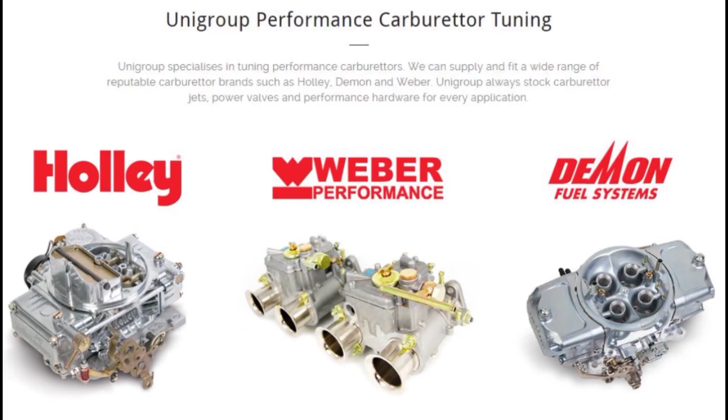We're in the dyno room. We've got a VK Commodore, Holden Commodore, 1985. It's a local Australian vehicle for those international people who may not know what a Holden is. It's here for a checkup. It's recently been purchased, and it's not a bad idea when you've got a high performance vehicle you've just bought to go over things and make sure everything's okay before you give it a hard time. It's also good for peace of mind and to establish some baselines. There are also minor complaints about some flat spots, etc. So we're going to run it on the dyno to see what we can find and come up with some fixes.

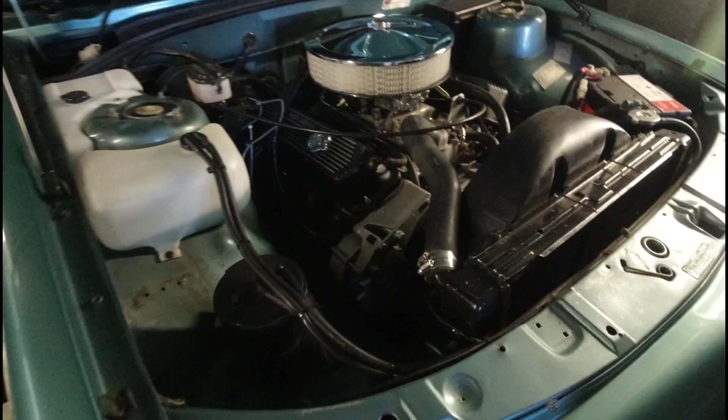A little bit of info about the engine and the car. It's a 308 Holden engine that's been stroked to 355 cubic inches. It's got some conrods inside, a main stud kit, and higher compression than standard - we're thinking somewhere around 10.5 to 11 to 1, thereabouts. It's got some roller rockers and a Brawler carburetor that we're going to look at today.

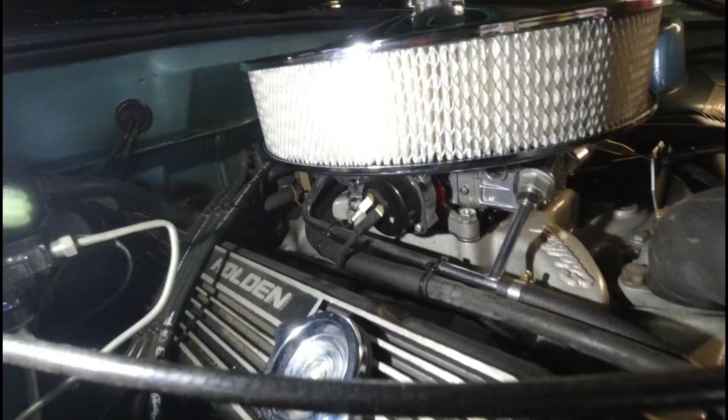Let's zoom in and take a close look. This vehicle has a Brawler carburetor with electric choke and vacuum secondaries. Just to clarify, vacuum secondaries means the secondary barrel is controlled by the carburetor, not directly by your foot and the throttle cable. The secondary barrel opens as airflow through the primary barrel reaches a point where it needs the secondary, automatically opening the butterflies in the secondary barrel. So this engine typically has four butterflies, two on the primary and two on the secondary, and the secondary opens with a vacuum actuator when the carburetor's got enough airflow through it.

We are on the dyno, so I'm going to take you through what I do and what I look at when I'm running the car. I've got two things hooked up to the vehicle: manifold vacuum, so I can see how much vacuum the engine's pulling, which somewhat correlates to how much throttle input I've got. As I open the throttle, the vacuum drops - zero vacuum is roughly full throttle, and at the moment she's pulling about 13-14 inches of mercury, which is closed throttle. These are rough numbers, so about -15 to 0 covers zero throttle to full throttle. The other thing I've got hooked up is air-fuel ratio, so I'm recording the mixtures, and also the dyno data so I can see power, torque, etc.

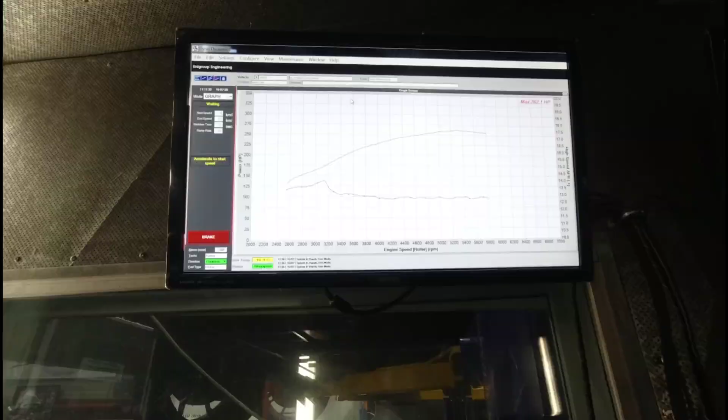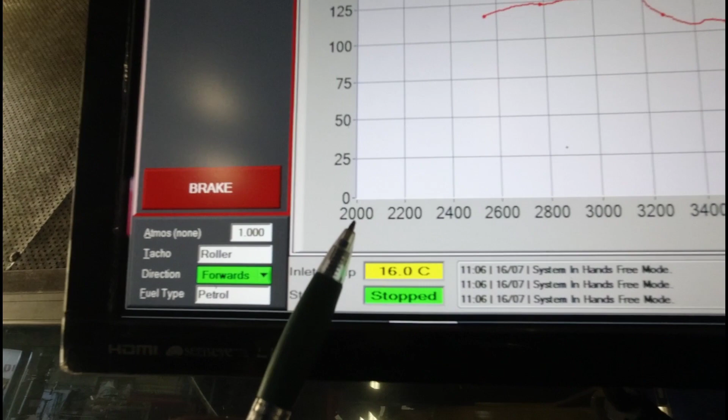Let's take a look at the dyno run now. So here's our 262 horsepower peak, this is what our power curve looks like. In here I've got RPM going from 2000 to 7000 RPM, and on this axis we've got horsepower from 0 to 350.

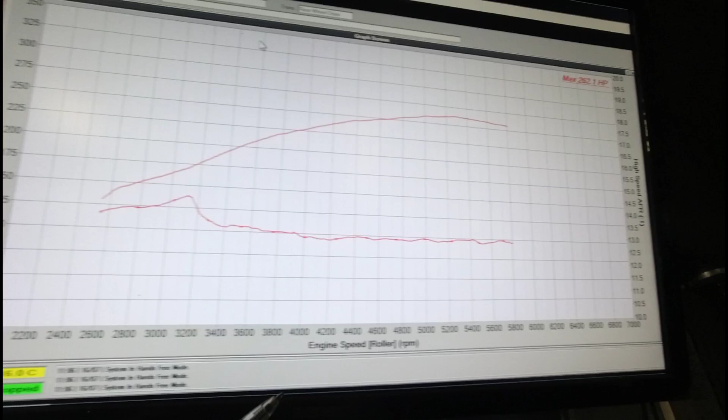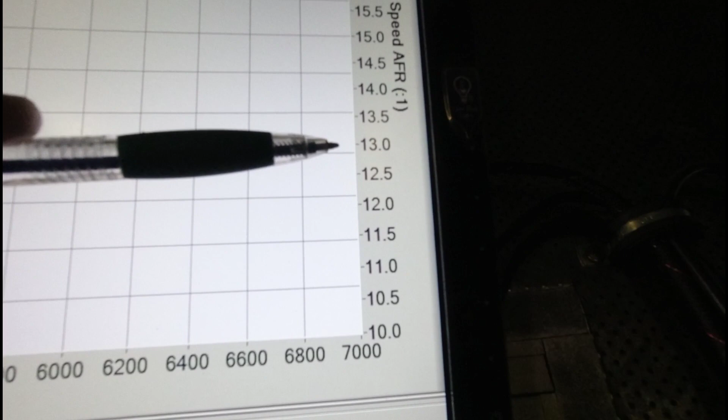Now on the right hand side I've got high speed air fuel ratio. We're expecting this engine to run somewhere between 12 and 13 to 1. So if we look at it, yep, it's somewhere around there for the run.

And then you can see here there's this little hump in the fuel mixture. This is where the secondary butterflies are opening up, and this is probably the hesitation that the driver can feel, that he was talking about.

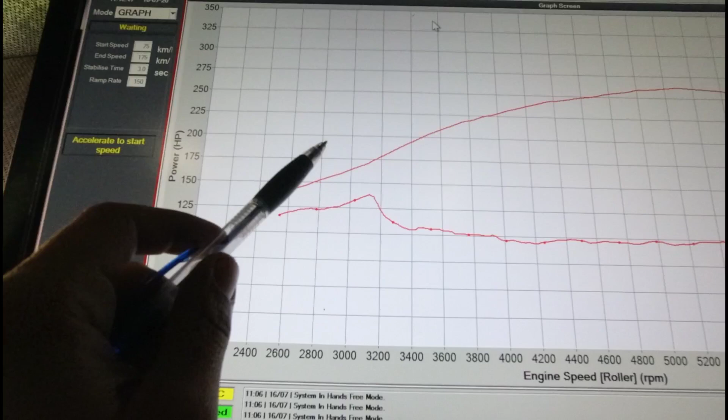And if we look at this point here as well, I don't know if you can notice it in the power curve, but there's a slight dip in the power instead of it coming up straight. So where the mixtures are weakening here to nearly 14 to 1, there's this slight drop in power. It's minor, but after all it is there, and we can see it, and now that we've taken measurements and we know what we're dealing with, we can do something about it.

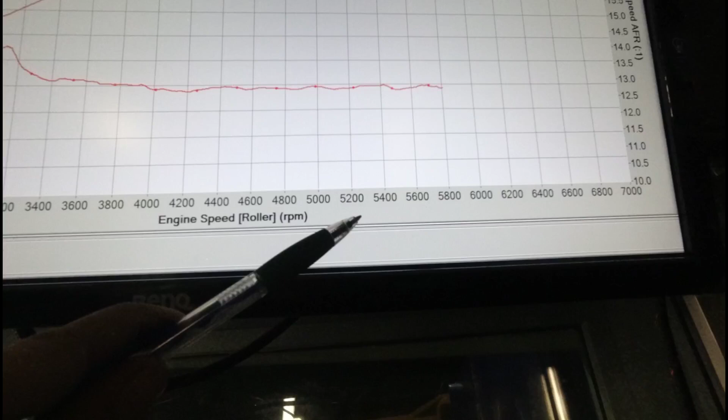Okay, so the engine again peaked somewhere around here, which is 5.2, 5.5. Not a bad looking curve. Based on the specs and what the engine was, I guess we were all hoping for a little bit higher than this, but this is what we've got to work with.

And we're looking at ways how we can improve. This is one good thing about bringing the car in for a checkup, because you get to see where you can improve the car, whether it's running right, and what are some of the things that can be done easily to get more out of the vehicle. So next thing we're going to try is perhaps a little bit more ignition timing and see how the engine reacts. I wanted to bring something else into the discussion as well.

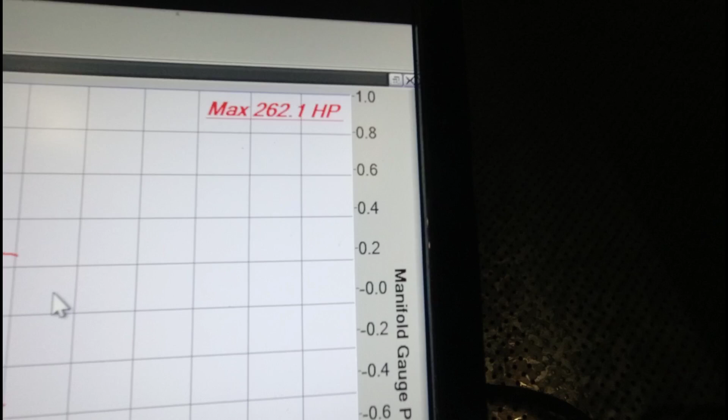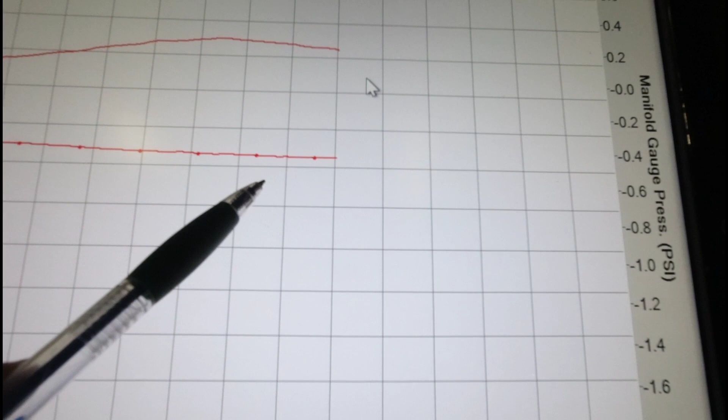I was measuring manifold vacuum on this car, and this is the manifold vacuum now on the right hand axis of the dyno graph. So in here I can see that we're nearly pulling half a psi, or really 0.4 of a psi vacuum, starting a little bit less here, maybe minus 0.3, going all the way to minus 0.4 vacuum.

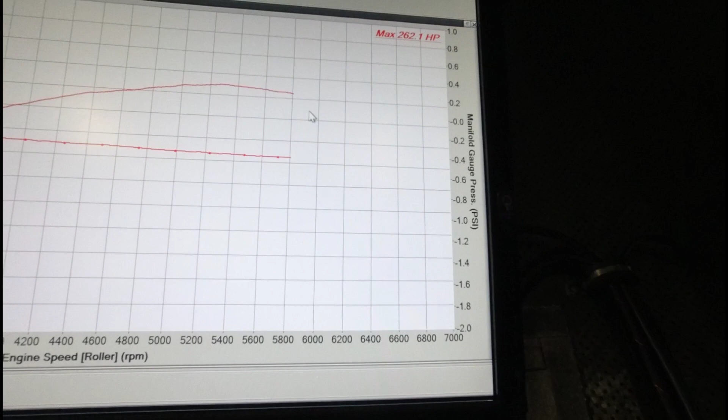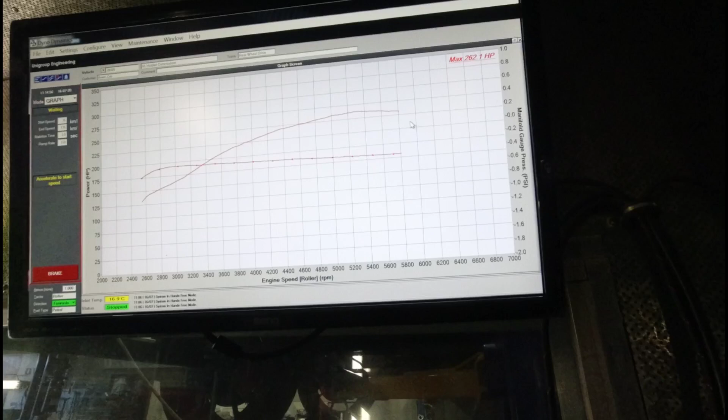So what does vacuum mean? Why am I looking at this? A quick explanation is I'm expecting this engine to pull nearly zero vacuum, especially with a carburetor this big. The more vacuum I pull, the more of a restriction that the carburetor or the inlet's posing to the engine. So if you've got a significant restriction on the inlet, it's obviously going to restrict the power.

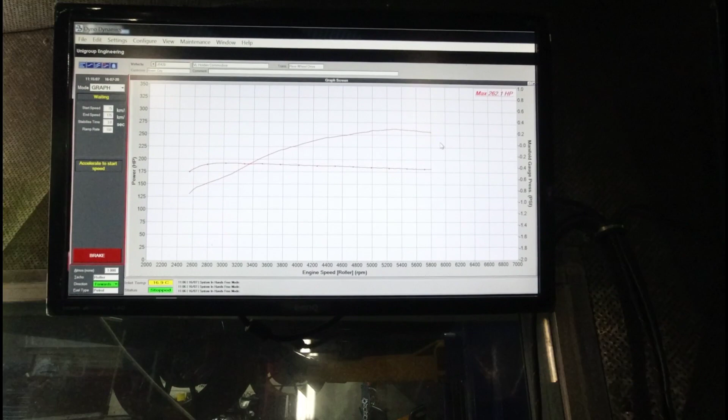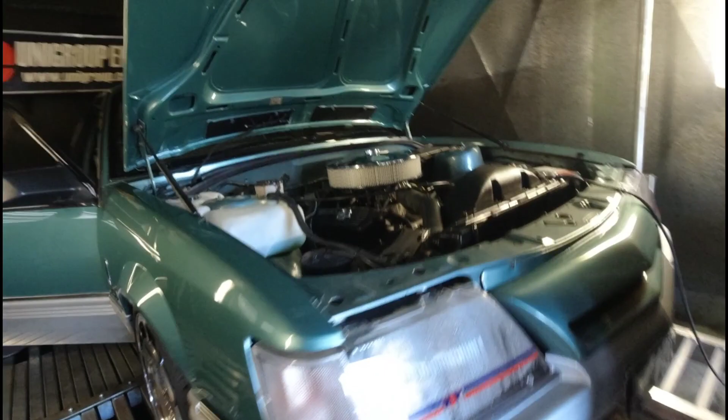So looking at this, we went and looked at the engine a little bit more, and we found some basics that we could have set up a little bit better, which is the throttle cable. So it wasn't adjusted 100%, so we're going to give it another run now with the throttle readjusted.

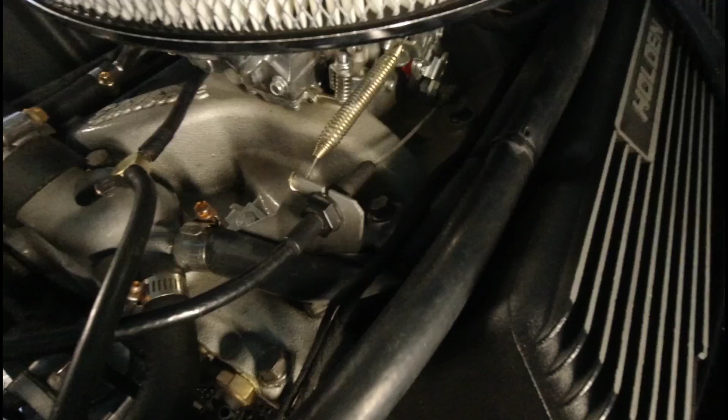And another thing I want to show you guys is this throttle bracket. So we'll go full throttle and you guys look at the flex in there. Okay, so it is flexing here, so it should be a more sturdy bracket.

You can see that I can move it with my hand, and you can also see here that I can pull just probably a little bit more throttle myself. So we are getting to probably 80-90% throttle, but not quite 100%. So we've just adjusted it so it gets almost 100%.

And let's see the power difference with this adjustment. Now I'm not really expecting a big difference, only because this is already a fairly big carburetor, being 770 CFM, for the power that we're making at the wheels. So if it's 260 or so horsepower at the wheels, probably at the engine we're somewhere near 300, which this carburetor will easily do. So let's give it another power run and see what we get.

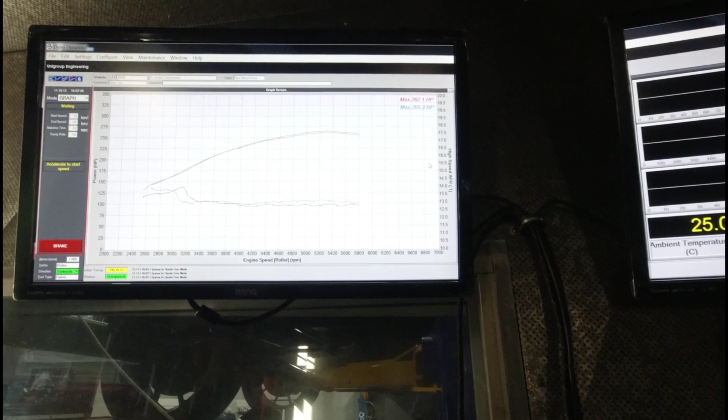After cable adjustments, this is our power run. We did gain that slight bit of extra power. Yes, it's not much, but again, we weren't expecting much of a gain because the carburetor is already large enough for this engine.

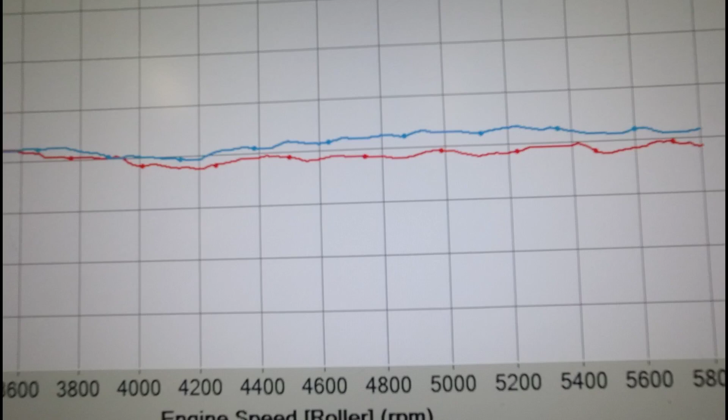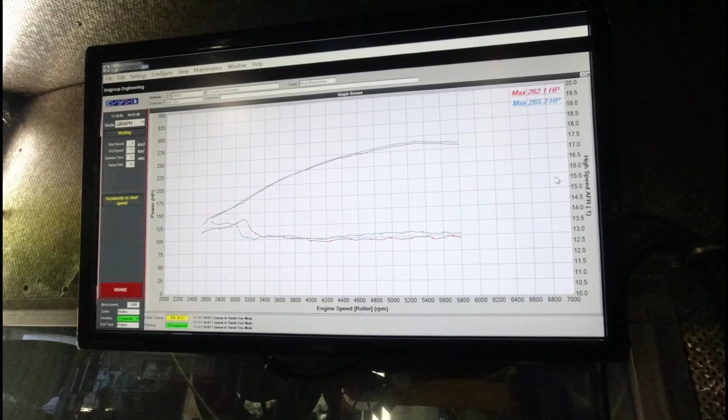An interesting observation is when the throttle's pulled that far, our mixture changes here, you can see the red being before, the blue being after, so we're somewhere around 13:1 air fuel ratio. Again, I would probably want to try a little bit richer mixtures, especially on the primary barrel, to fix up this spot. The engine would probably like a little bit more fuel earlier on in the rev range, around this 2,500 to 3,500 area, where the secondaries are coming in, and that should make the transition smoother as well.

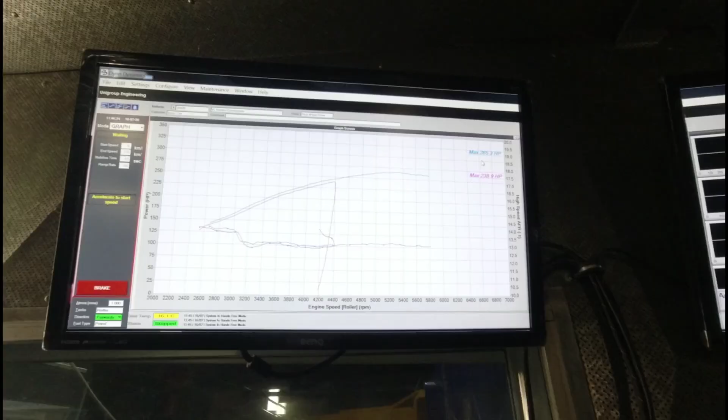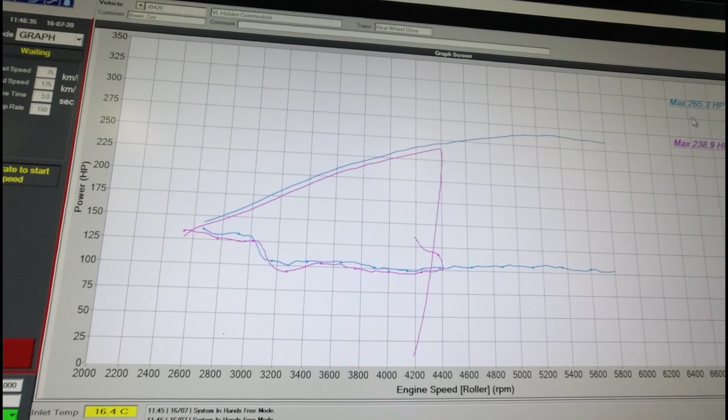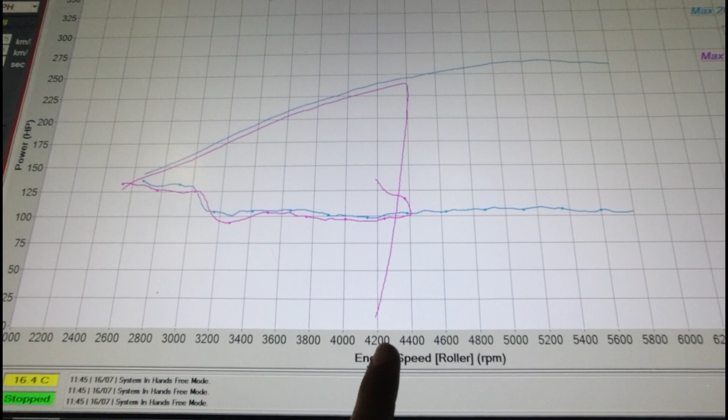After adjustments to ignition timing, what's happening? Well, the blue line is my before line, and my purple line is the after, with an extra 2.5 degrees of ignition timing. So I'm obviously going backwards here, so I didn't feel the need to do a full power run, I stopped at about 4,200, 4,300 RPM. I might now try less timing, see if the engine picks up power, because originally she was around 28-30 degrees total timing, which I thought she might like a bit more, but obviously doesn't. This is where dyno tuning is great.

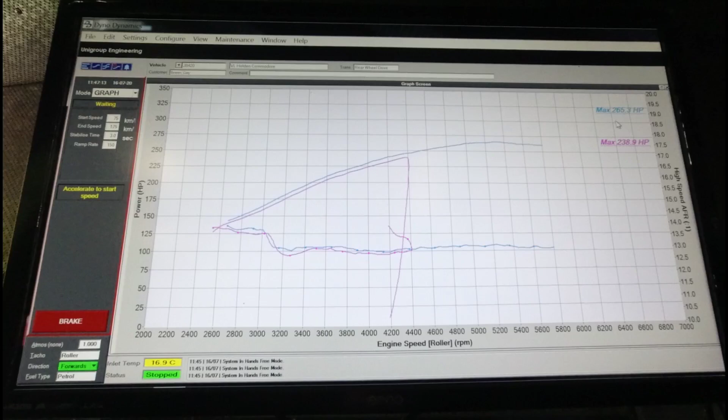You can see what the engine actually likes, and where you need to go with your changes. Sometimes you've got to make a move, and it can be positive or negative. At least if you make a move and it seems to be going backwards, you try the opposite and see how the engine reacts. So let's go do that now.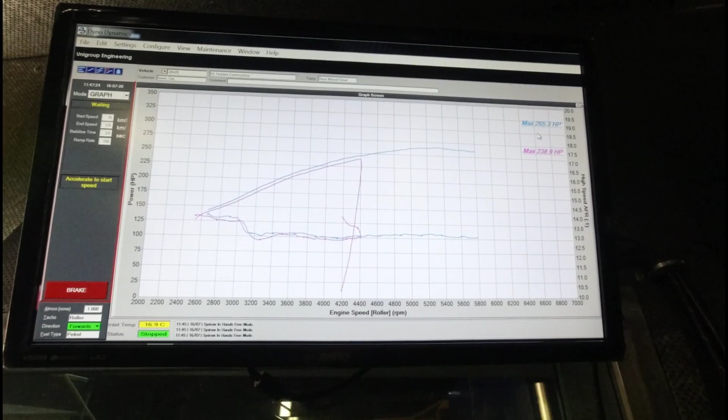Timing adjustments, take two, so less timing. This time I've got approximately 2.5 degrees less than what the car had originally. Let's see how the power responds. Now I don't need to pay attention to engine knocking this time, because it didn't knock even with the additional timing in it. So where I'm 4 degrees back from that timing figure, it's definitely not going to knock, and if it makes even the same power, it's going to be much safer. So let's run and find out.

Okay, we have ended up roughly where we were, so I might actually keep this ignition timing because it's going to be safer on the engine. I've ended up at 263, we were at 265, so it's down about 2 horsepower. It's not a big power engine, we're not going to miss the 2 horsepower. It's better to have that safety margin in case we pick up a bad batch of fuel or the motor's running hot one day, etc., where we need that extra safety. Yeah, I think this is going to be the setting. I'm going to keep this and lock the distributor up where it is now.

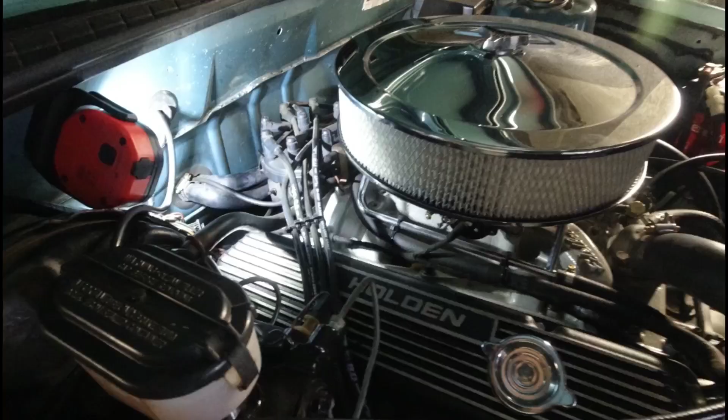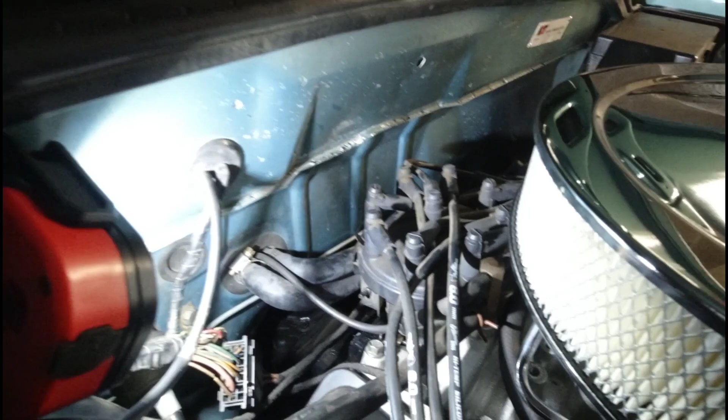Other observations from this engine so we can all learn. Vacuum advance - it's this unit here on the side of the distributor. I don't know how good the camera's getting it, but there it is. This is where a vacuum line connects, and that vacuum line goes under the carburetor to this point. What that does is it allows extra advance while you're cruising, while the carburetor's pulling a bit of vacuum at part throttle. That additional advance gives us better fuel economy, because by advancing it more at that part throttle, we're going to pick up some power for the given throttle setting.

For instance, if we were making 15 horsepower at, say, 5% throttle at that RPM, we might go to 18 or 20 horsepower, so we've got an extra 10, 20, sometimes 30% extra power at that part load. What that would mean is we can roll back on the throttle to our 15 horsepower, if that's all the power that's needed to maintain that cruise speed. But we're doing it with less throttle now, so it's going to end up with better economy.

The other advantage in having that running is we're going to probably get a sharper feeling engine at part throttle, because we've got the advance that's correct for that condition. You've got to remember, when we're not running vacuum advance and we're running fixed timing, that fixed timing is the correct timing for the engine under full throttle, but it's not necessarily correct for the engine at part throttle. So having this vacuum advance hooked up gives us timing closer to what the engine would require under part throttle, because there's not as much load on the engine at part throttle. Engines like more timing at that point, and it allows us to vary the timing to suit both conditions, full throttle and part throttle, by having that hooked up.

Well, I think that's about it from this one for today, so let's wrap it up.